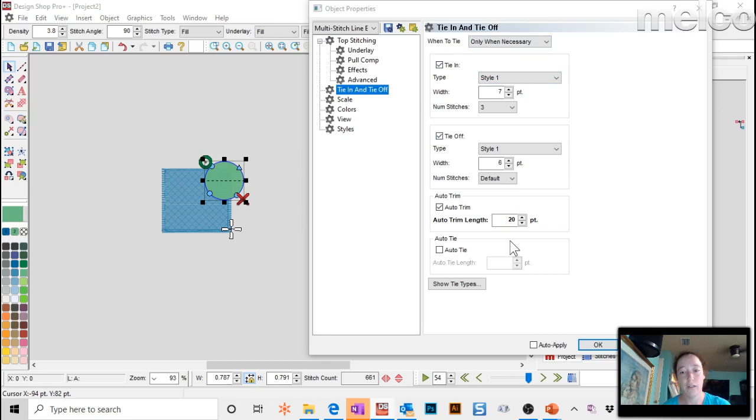So when you have the tie-ins and tie-offs turned on, it will automatically create that tie-off at the end of your element, and it'll end it. Awesome. So if you want it to return to origin, somewhere over here, there it is, the insert return to origin. That actually returns it to the origin.

So let's say you open up a design that was done by another digitizer and they put in that return to origin command. You can always come over to your OFM, select it and hit delete, and now that's gone. Okay. All right.

Someone's been using Melco since EDS3. That is quite the legacy going through everything.

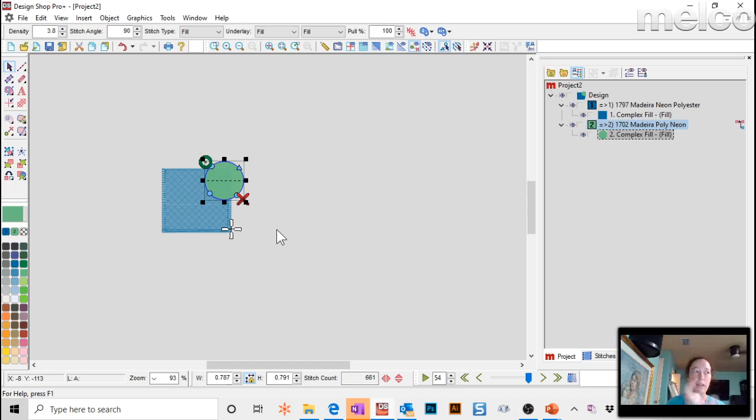I don't know, how's everyone doing with the quarantine? I know I've been holed up in my house making masks back there. See the rolls kind of sitting behind me? Hard to see. Let's see, will that do it? Yeah, these rolls in the back behind me. Which way? I don't know. Those are where all my fabrics are that I'm making masks out of.

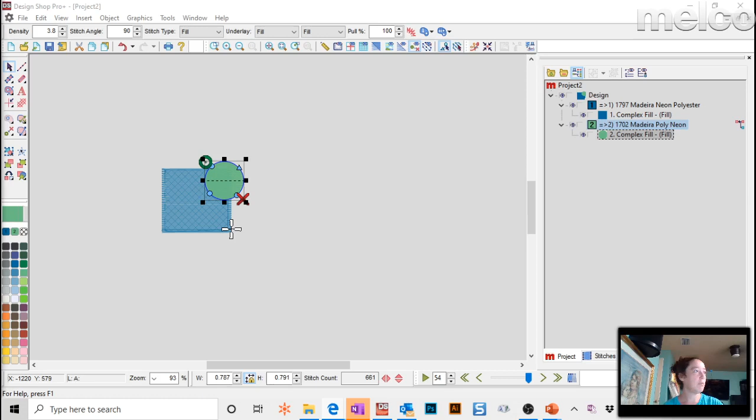On how to digitize from scratch. The first videos, basics through editing, really go through kind of how to work with designs you already have, and then starting with Digitizing Basics, it shows you how to create things from scratch.

So a question was typed in, how do we change the mask to be for a kid size? Okay, so let's look at that. I gotta go find the mask first. Give me a second. That's not it. I guess I could go get it off of the website. Sorry, hang on. Where did I put it? There it is. Masks. Okay, so here's the mask file. It's currently 7 by 3.5.

So if you want to modify this to be smaller for kids, the pleat file you can leave the same because all the kids file is going to do is make it more narrow, right? So to modify this, what I would do is just select everything, and if you look at the last stitch, that's the actual size of the mask, so about 7 inches. Whatever you want the kid size to be, I've seen online people suggesting anywhere from 5.5 to 6.5 on the width for children. So what I would do is take this entire file and I would just change it.

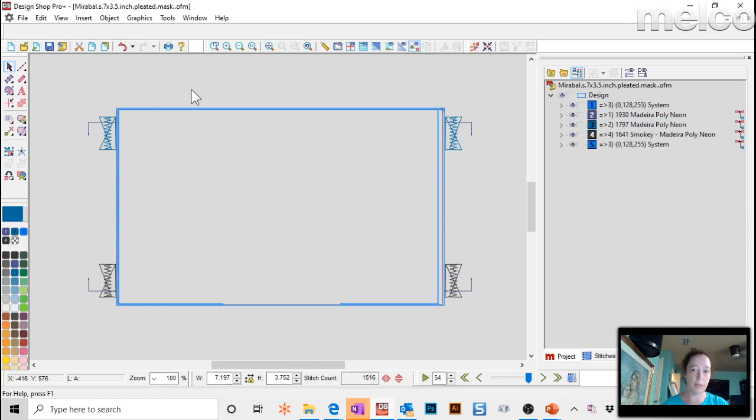So let's say we want to make it 6 wide. So right here, I'm going to turn off the lock aspect ratio because I just want to make it narrower. And let's say I change it to 6. All right. So once I have that one, I can select all the others and just drag it. And there we go. Now I've got a 6-inch mask. I'm going to make this one a little smaller. Oops, undo. I didn't mean to get that last stitch. So how I'm selecting all the other stitches is I'm holding the shift key down and selecting to the end. And that way I can go to scale it in until it's just outside that original box I made.

All right, so there we go. For the youth size, it's just making it narrower. Now the pleat file will be a little wider than you would actually need it, which isn't going to hurt anything. You can do the same thing with the pleat to save on fabric. Just make it a little bit narrower. Okay.

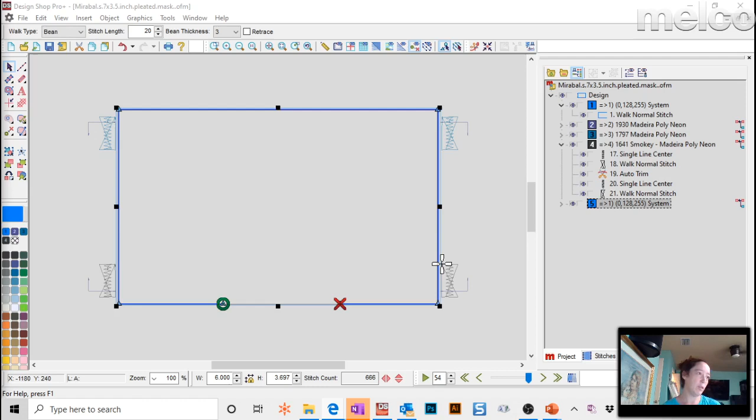I just wanted to know if you have any cool fill stitch partition sequences. I usually use 0123 or 4440 for basket. 4440 is fun. There was one, let's see, Nate and them, maybe they can type in the numbers. There's that smaller basket weave. I think it's 4 4s and then 4 0s. Let me try. I forget. I always just play with them until I find something that's interesting.

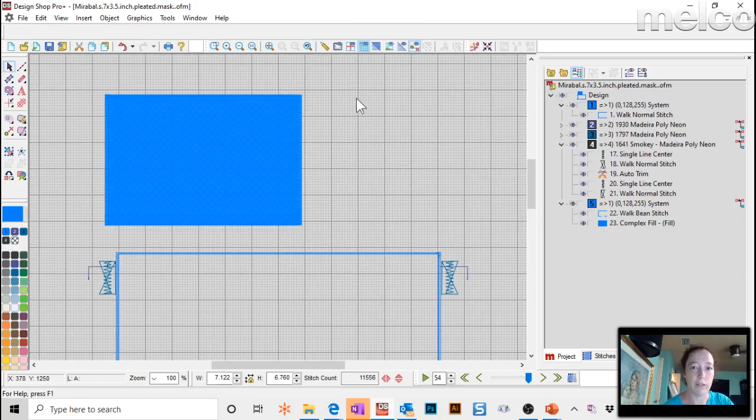Let's see. So the stitch partitions, if you haven't played with them, that's what's down here. So if I change this to 8 and then do, let's see what that one does. I think that's it. Kind of. That one's it. So that does like this little basket, I don't know what to call it, like a brick pattern. You can do less as well. So if I do 4400, there you go. So that gets you kind of a brick type pattern, which is fun.

There was another one, 1, 2, 3, 4, 4, 3, 2, 1, I think. Yeah, that's the zigzag one, which is kind of neat as well. So 1, 2, 3, 4, 4, 3, 2, 1 will give you a little zigzag look to it. Oh, the golf ball filling custom shapes. Yeah, that's another. All right. Trying to think if there are any other fun ones. I usually just play with numbers until something looks decent.

All right, what other questions do we have? I like the zigzag. That one's neat. Okay. Any other questions? Oh, I was showing resources. So you've got your videos that you can watch. The Digitizing Basics, this is where you start to learn how to bring an art file in and create all the different types of elements. There's different practice things.

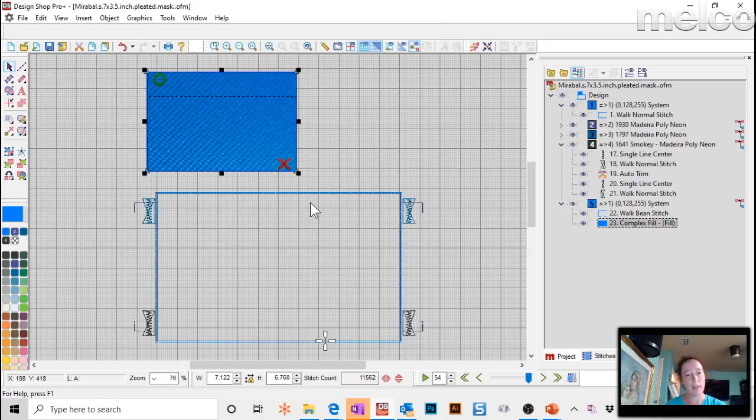Okay. Any other questions? I don't see any typed in. I'm trying to think if there's anything else interesting to discuss. So we talked about the mask, how to make it smaller. I'm actually going to save this. I got to run some kid masks. This is going to be 6. Desktop, I'll just put it there for now. All right. Any other questions? I don't see any typed in.

Well, I hope you guys are all making the most out of your quiet time, as I like to think of it. There's plenty of things we can do to think outside the box. Have I seen the new version of Design Shop? No, I haven't. What's new? I have no idea. I'd like to know. And if I did know, I couldn't share anyway, but I haven't seen it yet. I'm excited. I want to see as much as you guys do. So it'll be fun once it's released. Any other questions? I don't see any.

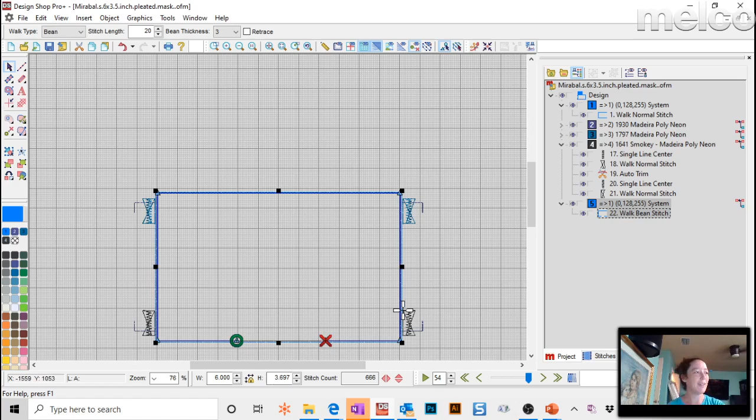Ah, there we go. So someone did put the link on how to do the activation and deactivation. Oh, if you haven't looked at these, I will point that out. I know not many people use them. If you go to melco-service.com, this is where you'll find all the manuals for your machines and different things. But this little place right here, this FAQ, is a lot of fun. You can find all kinds of info out there.

So someone just typed in, are there any tips for doing puff? Well, if you go to melco-service.com, and I'm just going to type in puff, there's some really great resources out here that you can review. There's some digitizing for 3D embroidery. There's a presentation that was done a while back, and there you can find the links to it. Details on how to do it on hats, all these different types of things. This article on 3D embroidery actually has a file in there where you can go see how to work on capping and the different considerations you have to think about when you're doing puff. So these are all really good resources for you.

With puff, the biggest thing I find is to remember to pick up your presser foot, and to make sure you have the settings on the machine right when you're actually sewing them. And then use a file that was digitized for puff. It makes a big difference. You don't want to be sewing a whole bunch of underlay, compressing the puff, so that when you go over it, you're not getting that full 3D effect and you've wasted a bunch of stitches, essentially.

Another thing when you're doing puff, make sure you get a heat gun. I don't know what to call them, so I call them pokies. When you rip off the foam, you'll see little pieces of the foam sticking out here and there. The very first one I did, I got some tweezers and sat there poking them in, and someone was like, "What are you doing? Get yourself a heat gun." And sure enough, you take a heat gun, wave it over it, and they all just kind of disappear. It tightens up and looks fabulous.

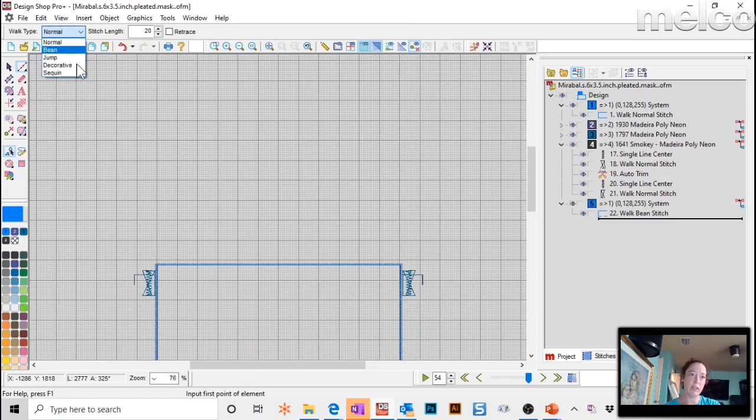What other questions? All right. Anything else? Trying to think of anything random I can talk about before my kids come charging in here like fools. All right. I don't see any others typed in.

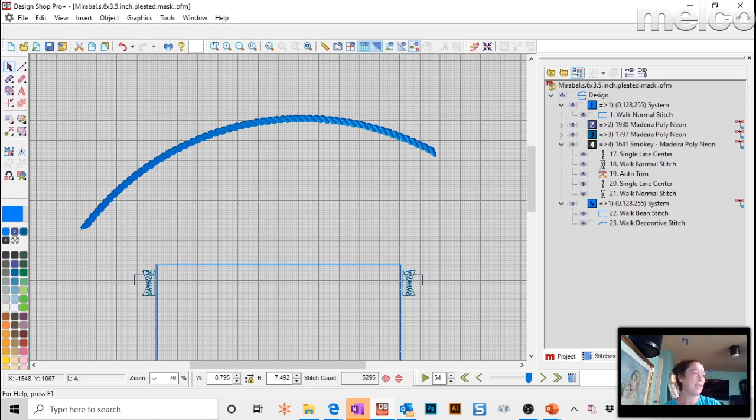Rachel, I'll show you since I still have it up. Oh, I merged it all, so let me turn it off. If I've got a design that has multiple colors, you can of course merge it by tossing this up. But what you were asking is how to auto merge. Right here, this button is auto merge color blocks, and that will automatically combine anything that's the same color stacked on top of each other. Okay.